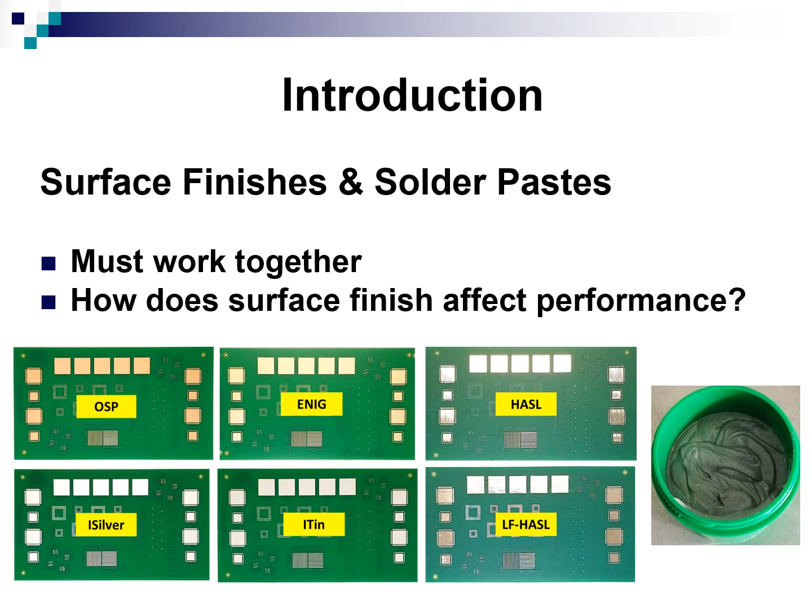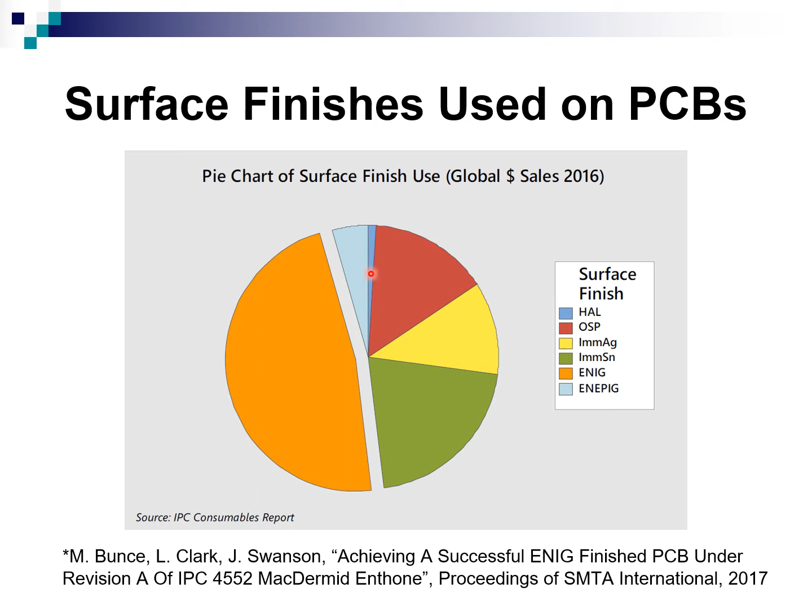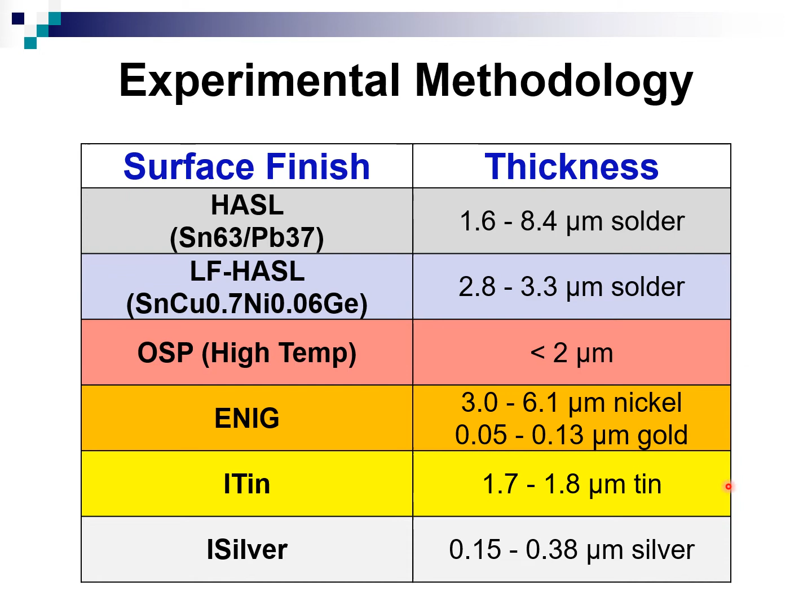The thicknesses were measured for the hot air level coatings to these values. The hot air level tin lead coating ranged in thickness pretty widely, from 1.6 to 8.4 microns, so it was fairly bumpy, not very planar. The lead-free HASL coating, by comparison, was a lot more flat, ranging in thickness from 2.8 to 3.3 microns, which isn't always the case. It is still a HASL coating, so there's still a risk of puddling and pooling, but for these particular test boards, which are fairly simple in design, it was a lot flatter and more uniform than the tin lead coating. The rest of these thickness values are all standard values for the different surface finishes.

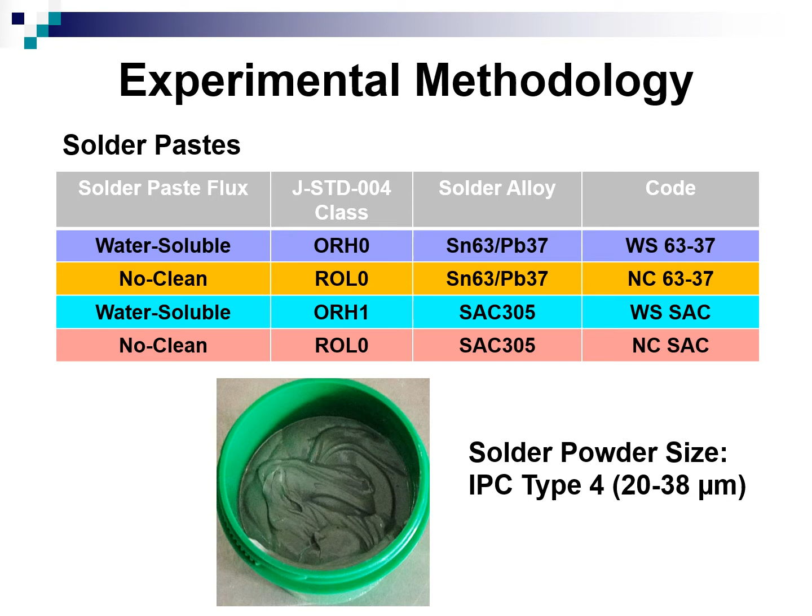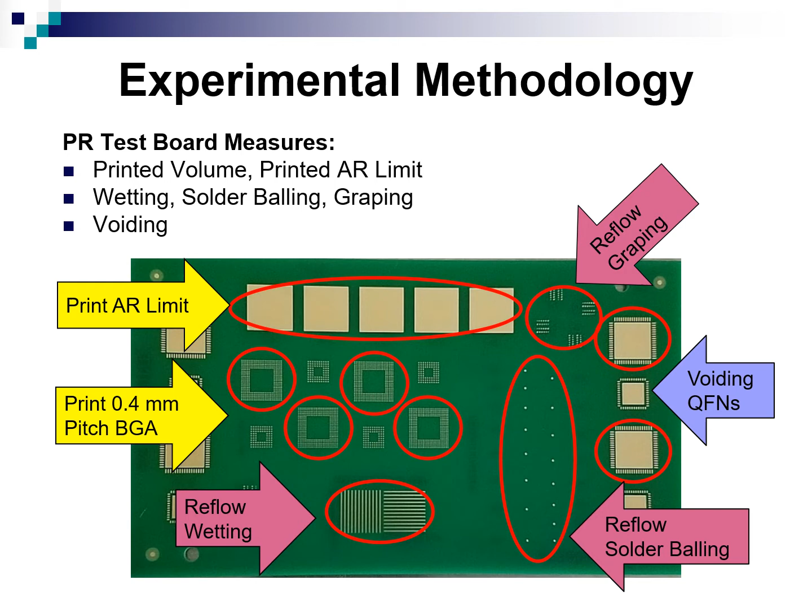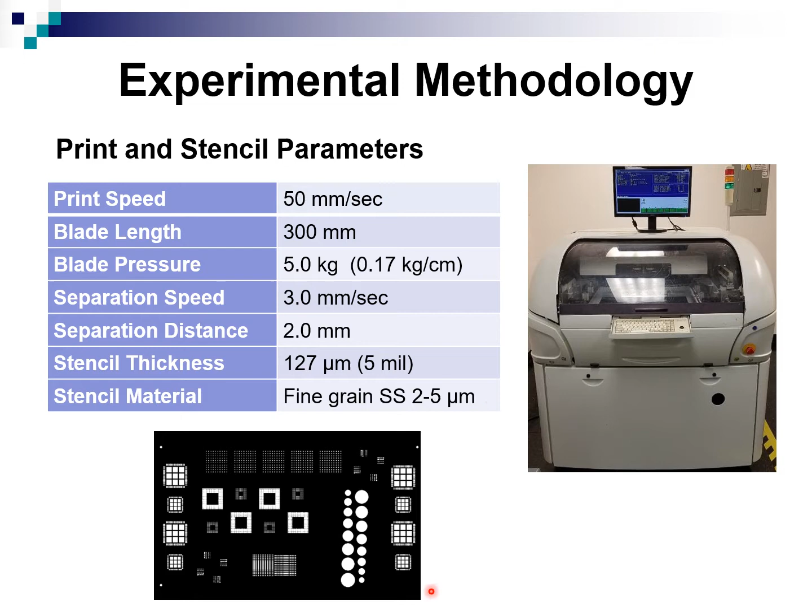Here are the print parameters that we used for this testing. All of the stencils were made of 5 mil thick, fine-grained stainless steel. And this is a picture of what the stencil design looked like.

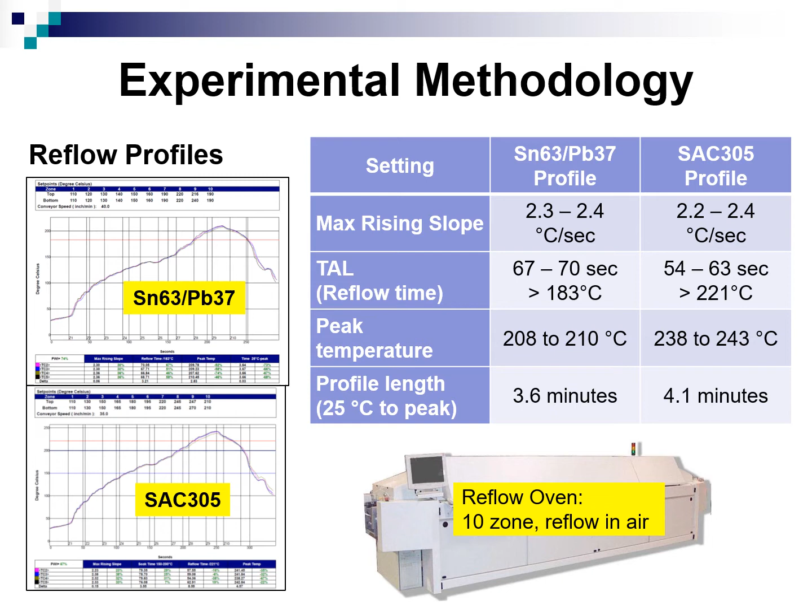So we printed the solder paste, measured solder paste volumes, placed the QFNs and reflowed the test boards. We took pictures of the solder joints. We tallied up the reflow data, and then we measured voiding underneath the QFN thermal pads. And then we repeated this.

We made 10 boards for each combination. There are 6 surface finishes and 4 solder pastes, so there's 24 total combinations. And then from that, the data that we gathered were transfer efficiency and coefficient of variation in both the 0.30 to 0.50 AR limit patterns and the 0.4 millimeter pitch BGA arrays.

In terms of reflow, we measured wetting percentage, solder balling, and graping percentage. And then in terms of voiding, we measured void area and the size of the largest void.

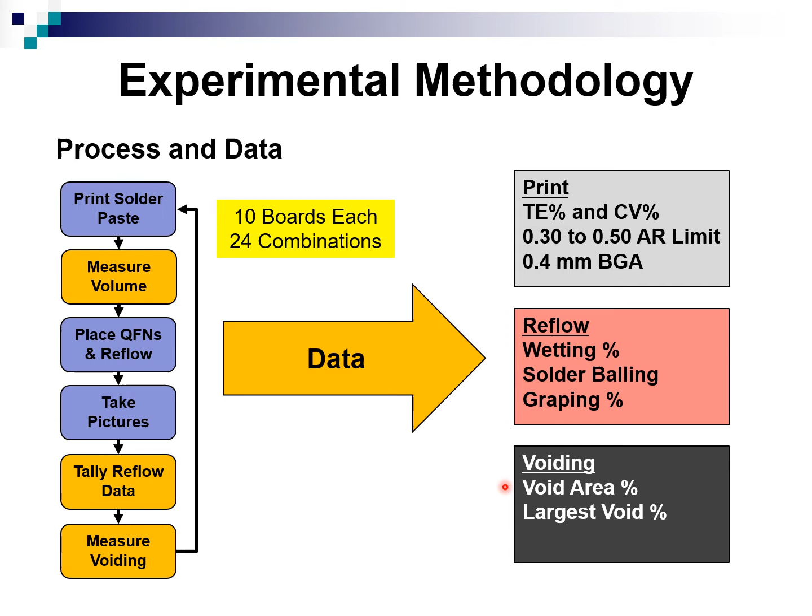Here's an example of the type of statistical analysis that I used in some parts of this presentation. We're going to show data as box plots in some cases. In terms of the box plot, the median or middle value is shown by the line in the middle of the box. The box itself represents the middle 50% of the data points. And then the minimum value is the bottom whisker and the maximum value is the top whisker.

And here's an example of a statistical analysis that we run called a Tukey-Kramer honestly significant difference test. This test allows you to compare data sets to each other and determine whether they are significantly different or if they are statistically similar. So for example, we have transfer efficiency here for the 4 different solder pastes.

And if you look at these box plots, they're all pretty wide. These ranges are pretty wide. And if you just visually compare these with your eyeball, you'd say maybe the tin lead water-soluble paste has a lower volume than the others, but is it significant? There's a lot of overlap here. So it's hard to say just intuitively by looking at these box plots, which is why we run this Tukey-Kramer HSD test.

The Tukey-Kramer HSD test spits out this connecting letters report, which gives you the mean values, and it assigns letter codes to each data set. If the letter codes are different, then the data sets are significantly different with a 95% confidence level. If the letter codes are the same, then they are statistically similar.

So in this case, the water-soluble SAC paste had a higher transfer efficiency than all of the others, and that was significantly higher. Both of the no-cleans are statistically similar, and then the water-soluble tin lead had the lowest overall transfer efficiency, and it's significantly lower than the others.

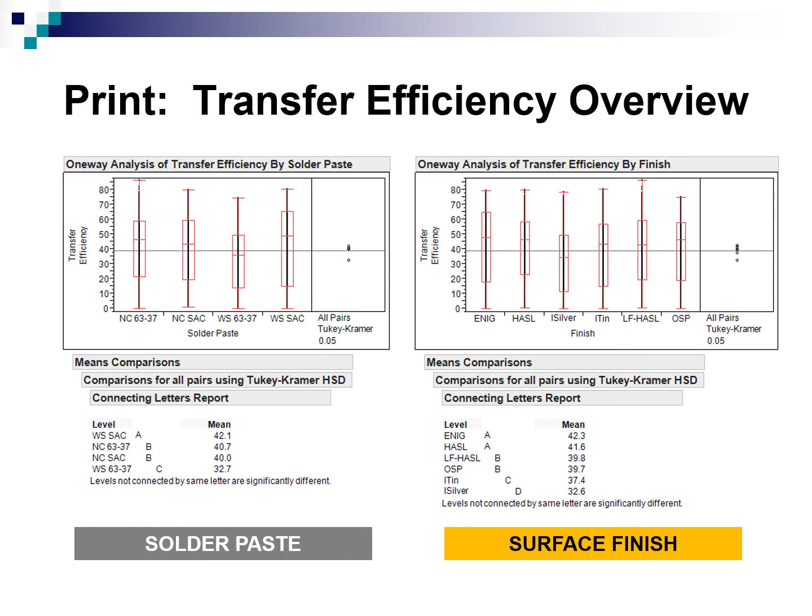Here's how the area ratio limit patterns work, generally speaking. So you've got transfer efficiency here and the different area ratios increasing up to 0.50 here. So at the 0.30 and 0.35, you can see very low transfer efficiencies, 5 to 15%. And that gets progressively higher with increasing area ratio, as you would expect.

This is the 0.50 area ratio pattern, which is pictured here. And then you've got the BGA arrays for comparison. And you get a little bit more volume out of the BGA arrays because those are normal etched pads with a solder mask clearance around them. And so there's some standoff, some off-contact printing going on in the BGA arrays, which is not present in these area ratio patterns because you're printing on essentially a big ground plane here.

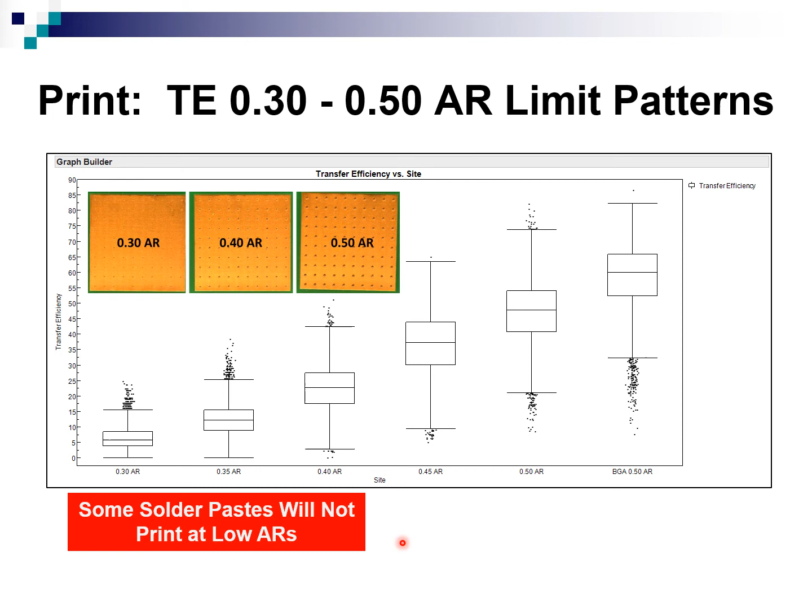But the whole point of using these is to see where the lower limit is. And some solder paste just will not print at these really low area ratios. So this really challenges solder paste, particularly in terms of printability.

Here's the transfer efficiency data for the 0.50 area ratio patterns. You've got transfer efficiency on the y-axis, and then the 4 different solder pastes are the major categories here, and the box plots are different colors for the different surface finishes.

I just want to point out that there is a lot of variation here. Look at the no clean tin lead paste - there's a lot of difference in transfer efficiency for these different surface finishes, and that's true for most of these pastes. The water-soluble SAC paste shows a little less variation. It prints somewhat equally well on all of these surface finishes.

Now I highlighted in red the HASL surface finish, and in green the immersion silver surface finish. The red HASL surface finish had the highest overall volumes in this pattern. The green immersion silver surface finish had the lowest overall volume in these patterns.

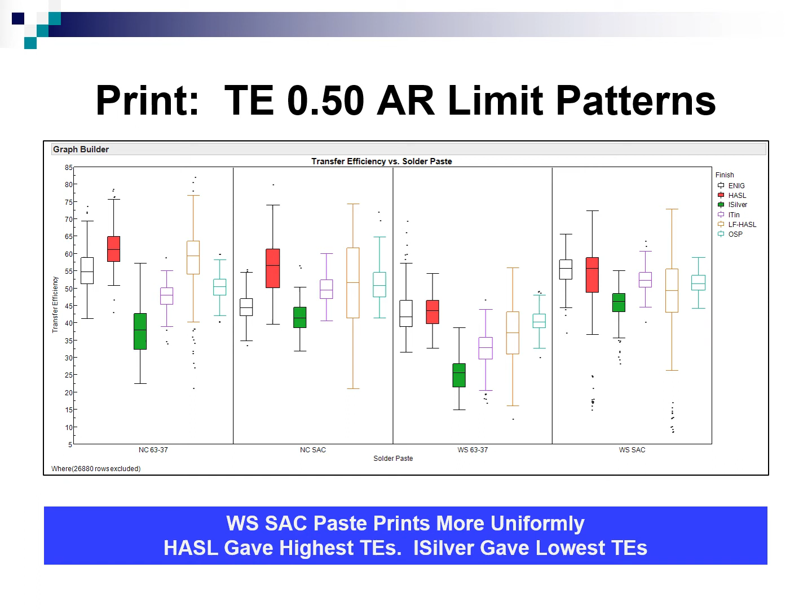Here's the same type of data for the 0.4 millimeter pitch BGAs, which happen to have a 0.50 area ratio as well. Again, there's a lot of variation here within each paste, except for the water-soluble SAC, which seems to print pretty equivalently well on all the finishes.

ENIG is highlighted in blue in this case, and immersion silver in green. So the ENIG surface finish gave the highest overall transfer efficiencies for each of these solder pastes, and the immersion silver was the lowest overall for each solder paste.

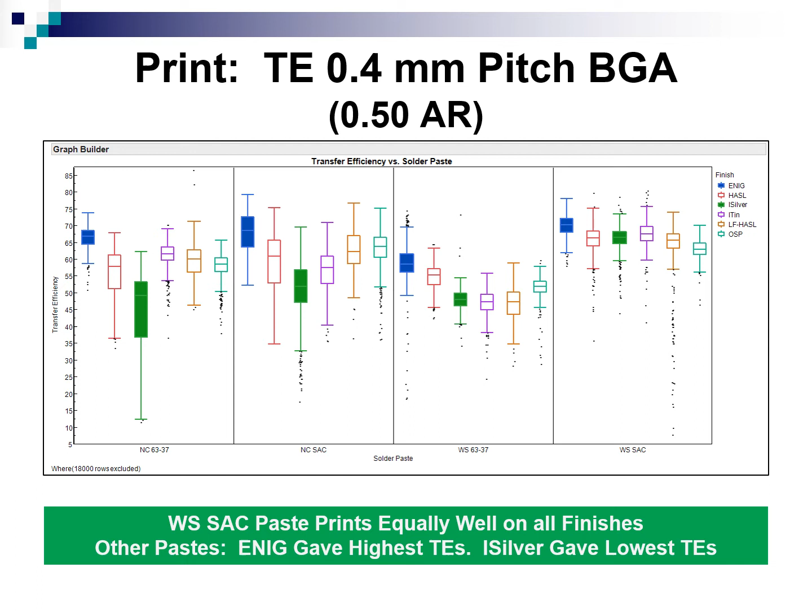Here's a summary of transfer efficiency and coefficient of variation for the 0.4 millimeter pitch BGAs, separated by surface finish. Here's the mean transfer efficiency data, the standard deviations, and then the coefficient of variation. Coefficient of variation is a measure of variability in the process, and the goal is to have a CV value of less than 10%.

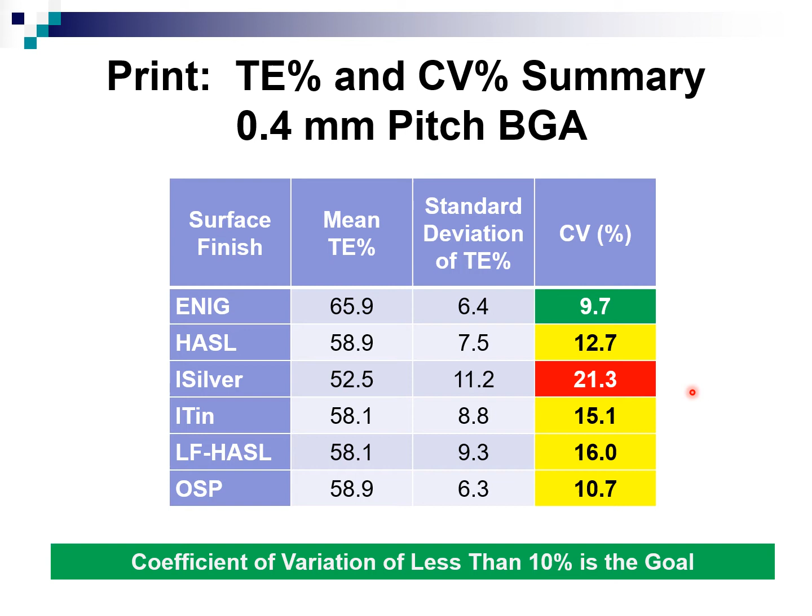Only ENIG matched that goal or went below that goal. HASL, immersion tin, lead-free HASL, and OSP all had values between 10 and 16% coefficient of variation, which isn't great, but it's definitely better than the immersion silver, which had a coefficient of variation of over 20%. So that means that there's a lot of volume variation when printing on immersion silver for these 4 solder pastes.

Here are the reflow test results.

Here's the wetting data. I'll briefly explain how the wetting pattern works. This wetting pattern has parallel lines with 15 bricks of solder paste printed down each line. Those spacings range from 0.1 millimeter in the center to 0.4 millimeter on the outside. Then during reflow, all those bricks merge together to form smooth continuous lines, as what's shown here. This is ideal wetting performance, or 100% wetting is the goal.

So this is the wetting data broken out by solder paste, including all of the surface finishes. No clean tin lead and water-soluble tin lead both wetted almost 100% on all the surface finishes, whereas the no clean SAC was down around 70 and the water-soluble SAC was down around 80% for all the surface finishes.

Here's that same wetting data broken out by surface finish. It includes all 4 solder pastes within each bar. So ENIG, immersion tin, and lead-free HASL all wetted very easily. They all had 100% wetting, followed by HASL and immersion silver, which were around 80%, and then OSP was the lowest overall wetting with about 55% spread.

Here's some pictures to show that OSP wetting or spread. This is the no clean SAC on OSP. These bricks pretty much stayed right where they were printed. They didn't flow very much. Whereas with a no clean tin lead solder paste on that same OSP finish, you get good wetting or spread where the bricks merge together very well.

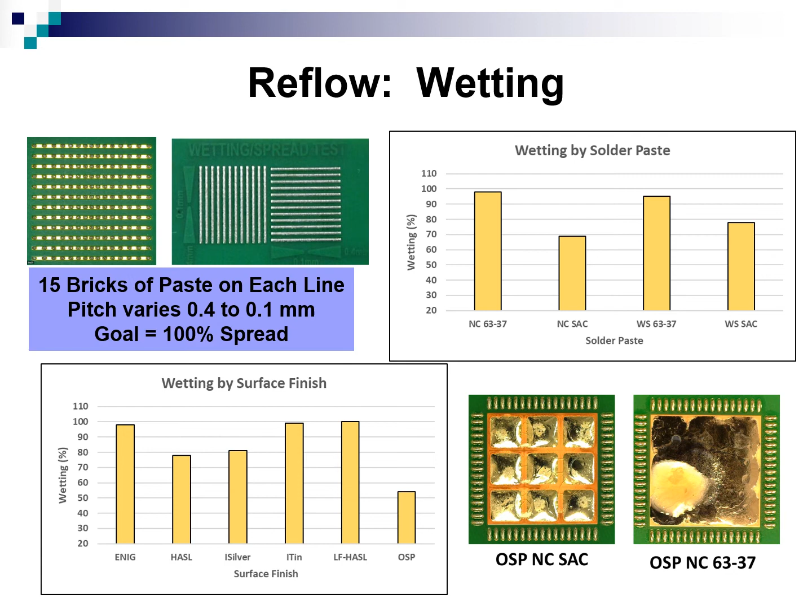Here's the wetting data for each surface finish and solder paste combination. The surface finishes are shown in the major categories, and then each solder paste is broken out within those. So ENIG, immersion tin, and lead-free HASL again had near 100% wetting regardless of solder paste. HASL had some variations - the tin lead solder paste had 100% wetting, and the lead-free solder pastes had 50 and 62% wetting.

Immersion silver had some variation as well. Water-soluble SAC wetted at almost 100%, followed by the no clean tin lead. Then the water-soluble tin lead and the no clean SAC was the lowest wetting on immersion silver.

And if you look at OSP, it had the widest variation of all the finishes. Both of the tin lead pastes had near 100% spread, whereas both of the lead-frees were down around 10 to 15% spread. These 2 pictures at the bottom show the best case and worst case scenario. You've got lead-free HASL with water-soluble SAC, 100% spread or wetting, and then the OSP with the no clean SAC - you can see these bricks didn't merge together very well. They pretty much stayed right where they were printed and didn't spread on those lines. So the wetting percentage was 11% in that case.

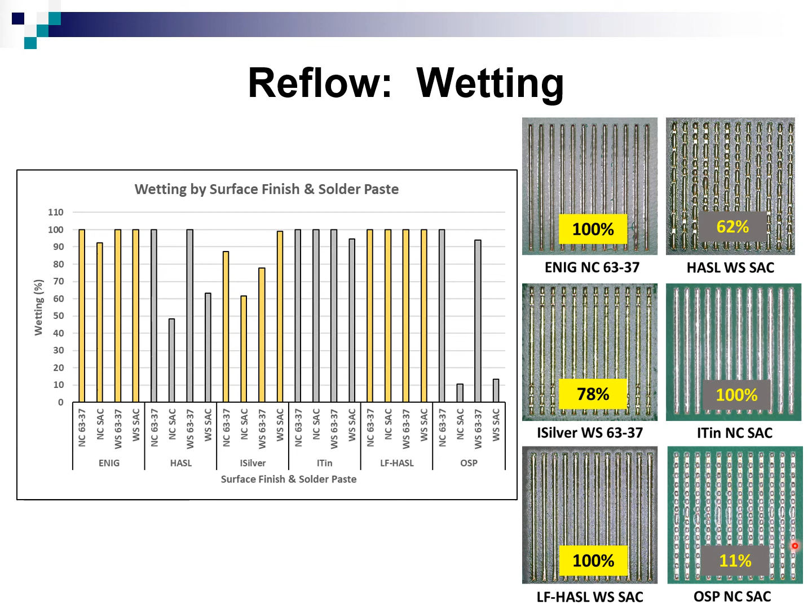Here's the solder balling data. The solder balling patterns work like this: there are 20 mil diameter pads on the circuit board surrounded by solder mask. We overprint onto the solder mask between 500% and 1250% over the size of those pads. Then during reflow, those pull back into a central sphere, and we inspect the flux pool for solder balls. We're talking about microscopic random solder balls here.

We measured solder balling in 3 performance categories: the largest overprint that had 0 solder balls, the largest that had less than 5, and the largest that had less than 10 solder balls. Then we gave them a rating. The goal is 1250%, which is the largest overprint. If you hit that rating, that is best possible performance.

Here's solder balling broken out by solder paste. In general, the no cleans and the water-soluble tin lead all had very good solder balling performance, where the water-soluble SAC did not have very good solder balling performance.

Here's that same data broken out by surface finish. ENIG, HASL, lead-free HASL, and OSP all had excellent solder balling performance. Immersion silver and immersion tin were a little worse in terms of solder balling, a little bit lower data here.

Here's an example of what we're looking at. Here's the OSP with water-soluble tin lead. You can see some rings of solder balls in these flux pools.

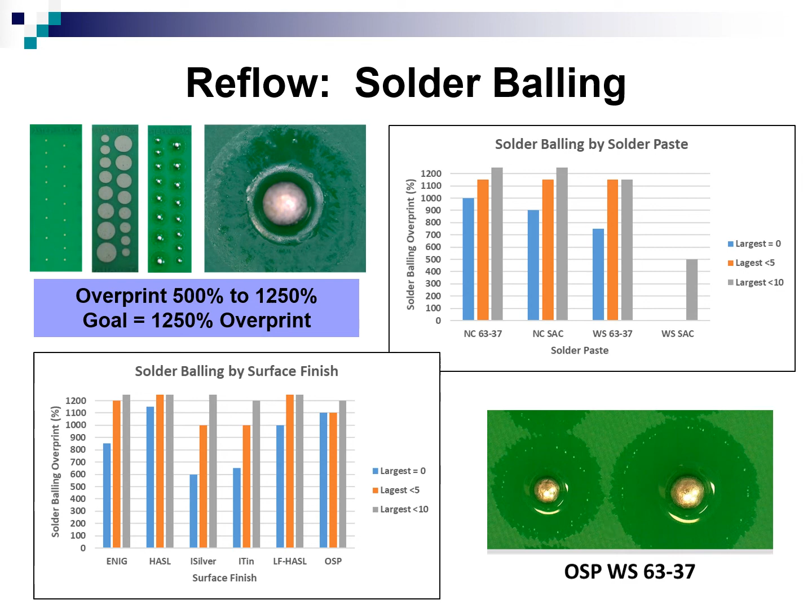Here's the graping data. Here's how the graping test pattern works. There are 4 columns of pads, both circles and squares, non-solder mask defined and solder mask defined, and they change in size. The size of the pads ranges from 7 mils up to 12 mils, and the area ratios on the stencil correspondingly are 0.35 up to 0.60. So really small area ratios again, which challenge the printability of the solder paste. The lower volume deposits tend to be susceptible to graping during reflow.

The goal here would be to have 0% graping. So the graping looks like this picture below. You can see these larger deposits are very smooth and well formed, and then the smaller deposits here have clearly graped deposits.

Here's the graping data broken out by solder paste, including all finishes. No clean tin lead was the lowest, followed by water soluble SAC, then water soluble tin lead, and then no clean SAC had the highest graping, generally speaking.

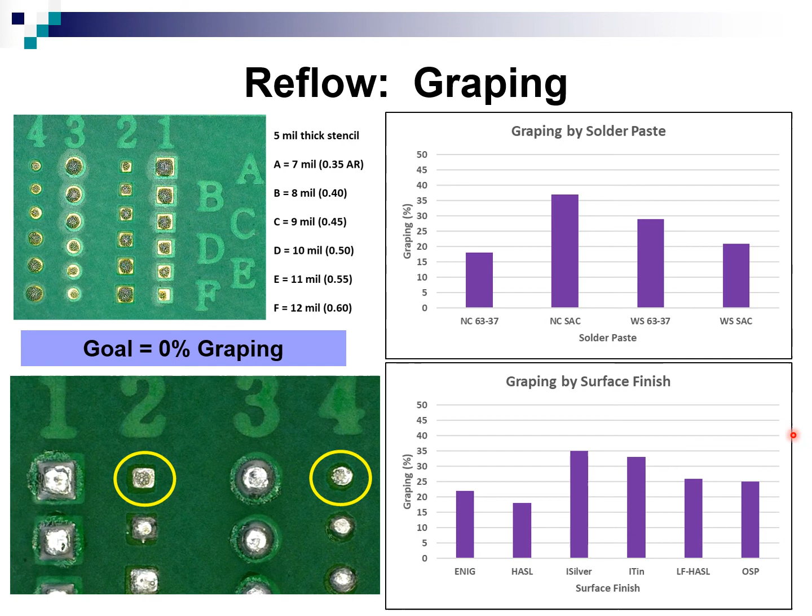Then the graping broken out by surface finish: you've got ENIG and HASL, which are the lowest, followed by lead-free HASL and OSP, and then immersion silver and immersion tin gave the highest overall graping. This includes the data for all of the solder pastes.

Here's the graping for every combination of surface finish in each measure category and solder paste broken out for each line. Again, you see variation on these finishes. Generally speaking, ENIG and HASL had pretty low graping numbers, but there's some variation based on these different solder pastes. Immersion silver had high graping with most of the pastes, but low graping with the no clean tin lead.

And immersion tin had high graping with most pastes, but low graping with the water soluble SAC. The lead-free HASL had pretty wide variation, and the OSP again had the widest variation. So the no clean tin lead paste on OSP gave almost 0% graping, whereas the no clean SAC gave 45% graping, which is the highest overall graping.

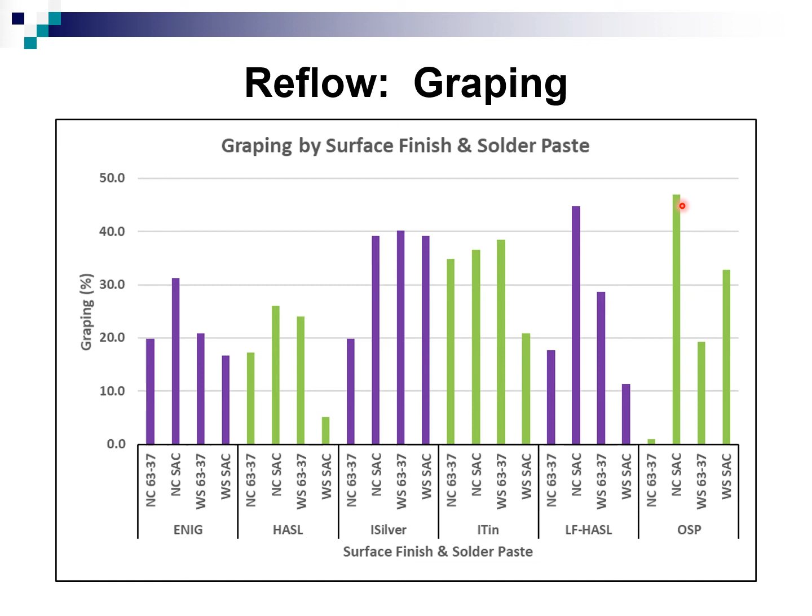Here are the voiding test results. In terms of voiding, what we're doing is we're printing solder paste in a 9-window pane pattern on the QFN thermal pad, placing these QFNs, which have a matte tin finish. The body size on that is 10 millimeters across. The goal here would be to have 0% void area, but that's not what we got. So we got some voids that look like these pictures below.

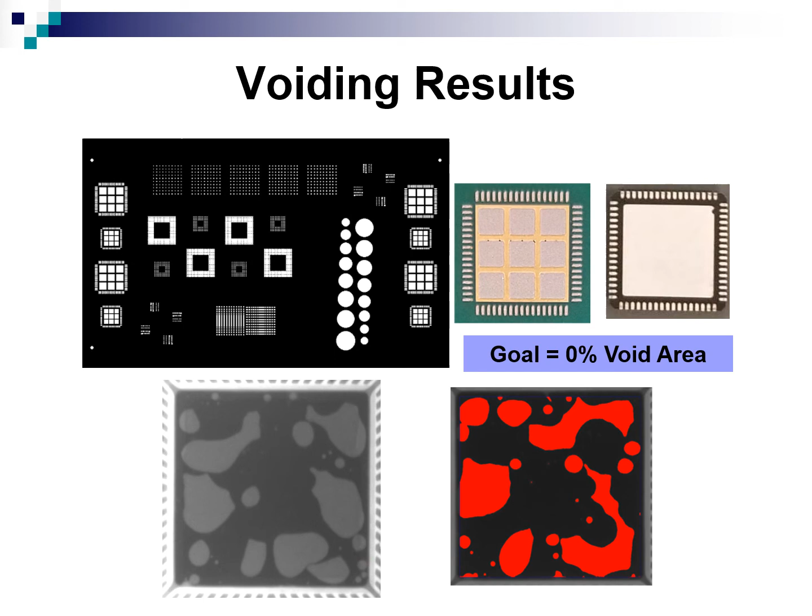Here's the voiding broken out by solder paste. Water-soluble tin lead is the lowest, followed by no clean tin lead, no clean SAC, and then the water-soluble SAC is clearly higher here. The Tukey Kramer analysis validates that. Water-soluble SAC is the highest voiding with 28% void area, followed by no clean SAC, which is 11% void area. Then no clean tin lead is 7%, and the water-soluble tin lead was as low as 4% void area. This includes data for all the surface finishes, so there's clear differences in void performance based on solder paste.

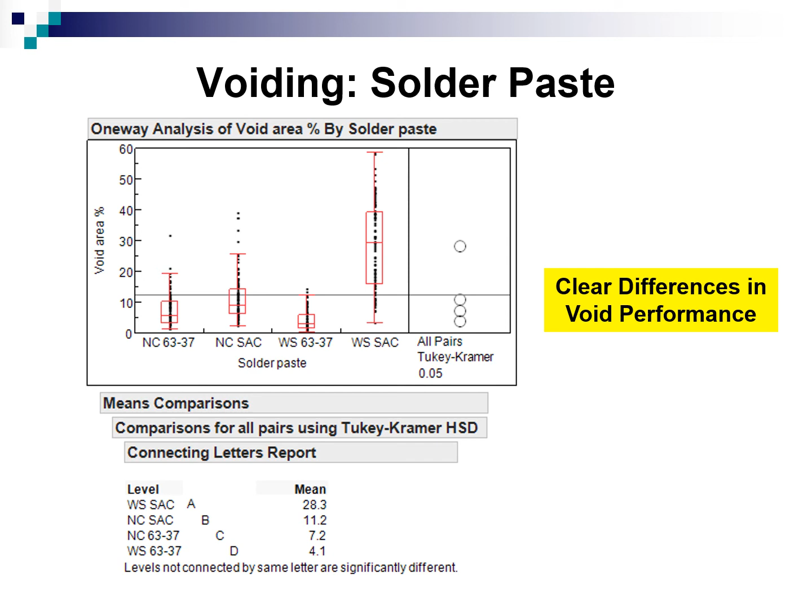Here's the voiding data broken out by surface finish, including all of the solder pastes within each surface finish. Immersion silver has the lowest overall voiding, followed by a combination of ENIG, HASL, lead-free HASL, and it looks like OSP and immersion tin are the higher end voiding. But there's a lot of overlap here in these data sets.

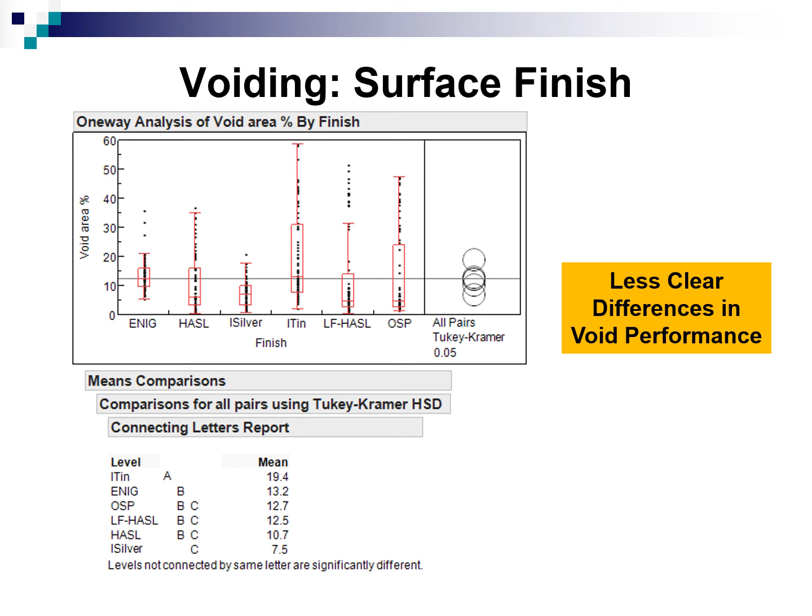Looking at the connecting letters report, immersion tin had the highest overall voiding, and that was significantly higher than all of the others. Then ENIG through HASL here have the same letter code, so they're all statistically similar. And then OSP through immersion silver all have the same letter code, so those are all statistically similar. Immersion silver did have the lowest mean, but it's statistically similar to the three surface finishes above it here. So the voiding differences based on surface finish are a little less clear than they were by solder paste, but there are some differences.

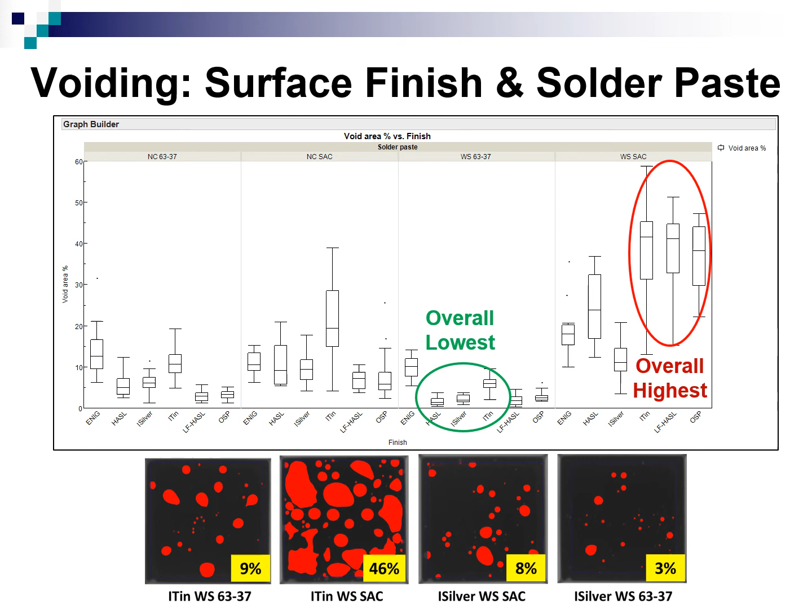Here's the scoring system. I came up with a scoring system to try to sort out these combinations. I wanted to quantify what was the best set of solder paste and surface finish combinations and which were the worst surface finish and solder paste combinations.

So here's the way I set up my scoring system. I measured performance in these 9 different categories - I've got 4 print categories, 3 reflow categories, and 2 void categories. I assigned a total possible score of 5 points, 1 would be the lowest score, 5 is the highest. And then I tallied up the scores for each of these combinations, and the total possible is 45 points for each surface finish solder paste combo.

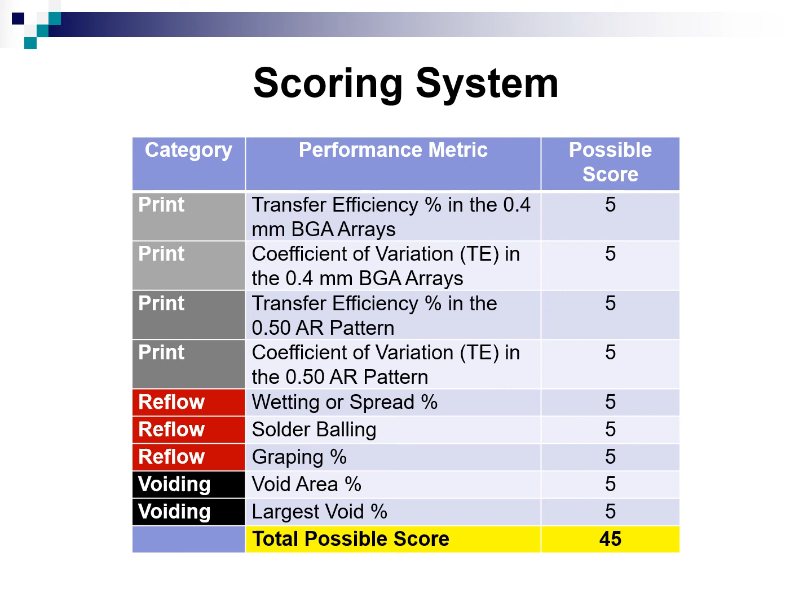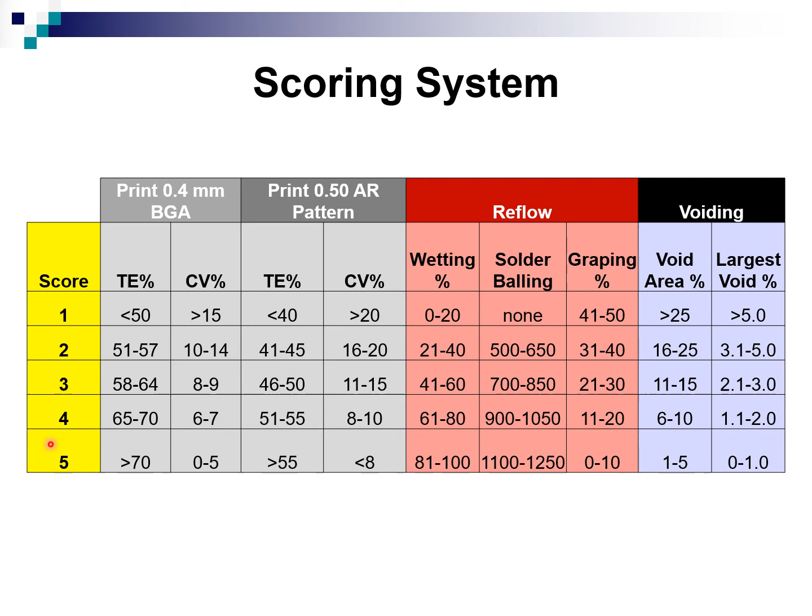Here's the actual scoring system that I used. Here's the different scores. Again, 1 is the lowest or worst performance, 5 is the highest or best performance, and here are the metrics that I used to rank performance.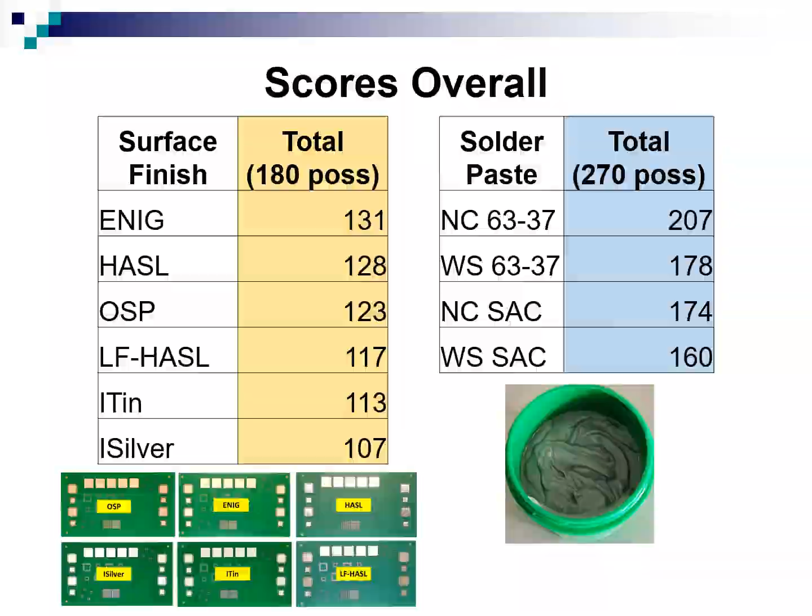Here's the total set of scores of every surface finish and solder paste combination. Here's the print score, the reflow score, the voiding score, and the total out of 45. And these are ranked from highest to lowest. So at the top, you've got OSP no clean tin lead, ENIG no clean tin lead, lead-free HASL with no clean tin lead, and so on. If you look at the top 10, there's 7 tin lead solder pastes, 3 ENIG finishes, and 3 HASL finishes.

Then if you look down at the lowest scoring combinations, you got lead-free HASL with water-soluble SAC, OSP water-soluble SAC, immersion tin water-soluble tin lead, immersion silver with no clean SAC, and so on. There are 7 SAC solder pastes in the bottom 10, 3 immersion tin and 3 immersion silver surface finishes. So generally speaking, the tin lead pastes outperformed the SAC solder pastes. ENIG and HASL outperformed the immersion tin and immersion silver surface finishes. And the other combinations were in the middle.

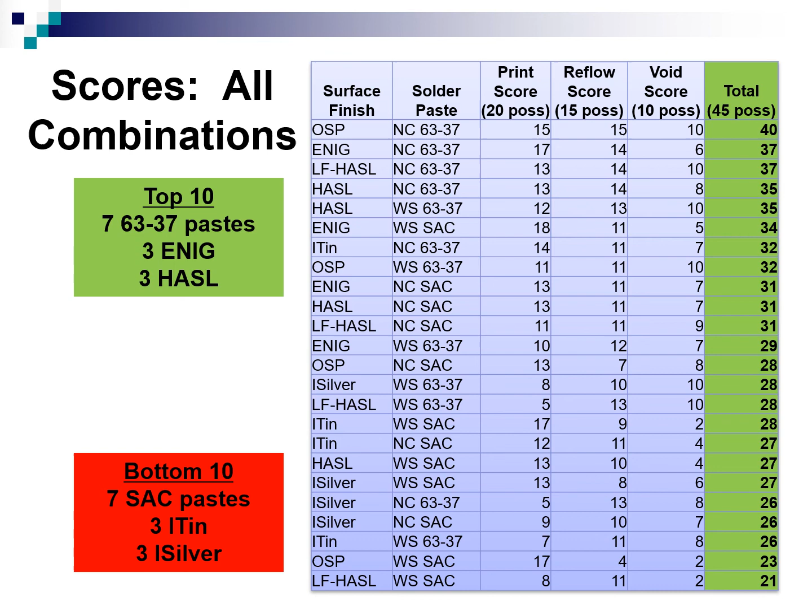Here's that same set of scores, but these are blocked together, grouped together by surface finish. So within each surface finish grouping, they're sorted from highest to lowest score so that you could pick a surface finish and solder paste that had the best possible scores. Of course, if you look at these, you've got ENIG with no clean tin lead, HASL no clean tin lead, immersion silver water-soluble tin lead, and so on.

Like the tin lead pastes are the highest scoring. So if you have to use lead-free, then you'd have to move down a little bit and say, okay, ENIG with water-soluble SAC is a good combination, HASL with no clean SAC, and so on and so forth.

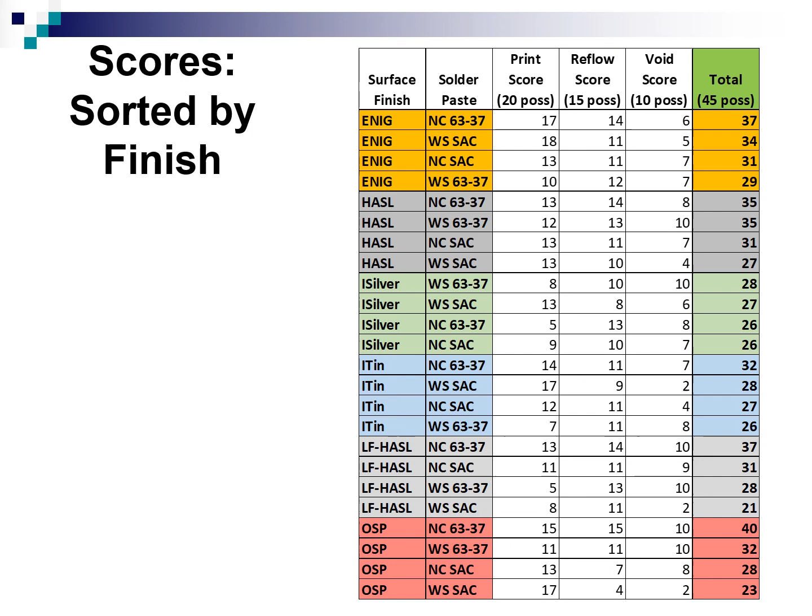Here's an overview of all of the scores. This is an overview of surface finish performance, covering the surface finishes that I tested in terms of printing, reflow, and voiding performance.

ENIG had good print and reflow performance, but it was not very good in terms of void performance. Tin lead HASL was okay, or moderately performing across the board.

Immersion silver was pretty poor with print and reflow, but it was excellent with voiding performance. It was the lowest overall voiding surface finish.

Immersion tin was moderate with print and reflow and not so good with voiding. It had one of the highest overall voiding numbers.

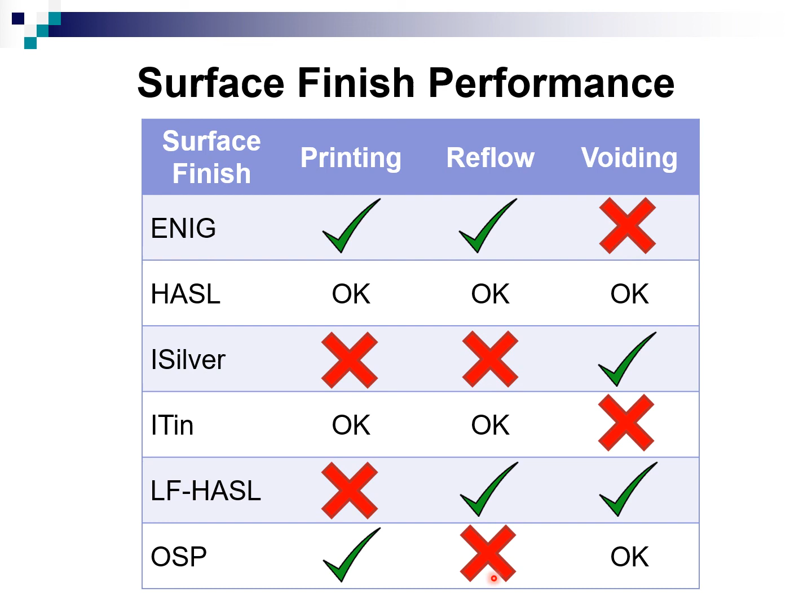Lead-free HASL was not so good with print, was very good with reflow and voiding performance. OSP was good with printing, not so good with reflow, and it was okay or moderate with voiding performance.

So from all this data, here are the conclusions that we can draw. The no-clean tin lead solder paste worked well with most of the surface finishes, but the no-clean SAC 305 would be the best lead-free option for the surface finishes that we tested.

ENIG and tin lead HASL worked well with most of the solder pastes, so if you have a choice to choose your surface finish, I would recommend one of those two.

Immersion tin and immersion silver did not perform as well as the other finishes, and that was a little surprising to me. I expected better performance out of those two. They need to step it up next time.

And then OSP and lead-free HASL gave a wide range of performance depending on the solder paste. In some cases, their performance was excellent, and in other cases, it was not very good.

So the performance of these combinations definitely depends on both the solder paste and the surface finish that you're using.

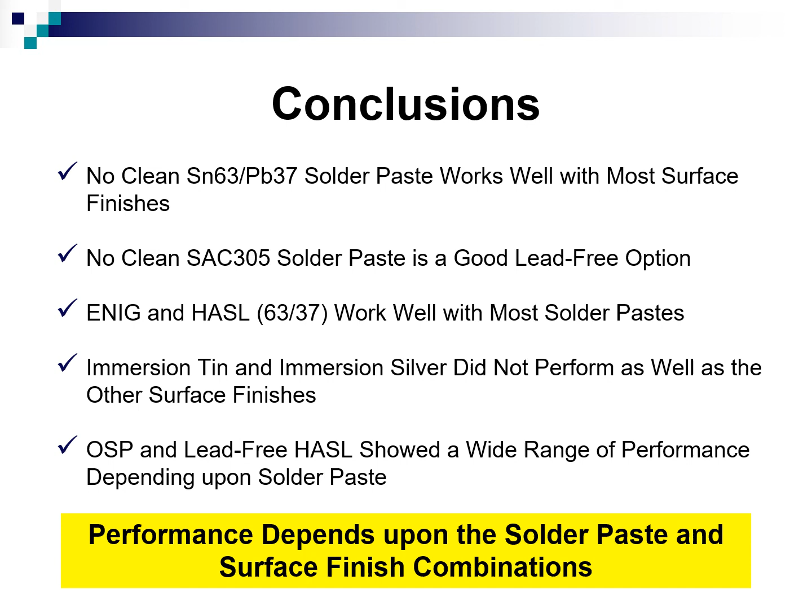Here are recommendations. We would recommend you run a similar evaluation in your process with your surface finishes and your solder pastes. And if you have the ability to change your surface finish, I'd recommend you pick a couple that work well with the paste that you're using.

Or vice versa. You can't change the surface finishes, but you can pick your solder paste. Pick some solder pastes that work well with all of the finishes that you use.

Now, one thing I should say is that surface finish and solder paste varied pretty dramatically by manufacturer. Obviously, I used our solder paste in this experiment. If you use solder paste from one of our competitors, they're going to perform a little differently in this testing. That's why I'd recommend you run a similar evaluation.

And in terms of surface finish, two different circuit board manufacturers with the same process and the same chemistry from the same supplier might run them differently, and they might have different process controls. So you might get different results on the surface finishes from two different board suppliers.

So I'd recommend that you test your surface finishes from each board supplier that you deal with. I know that sounds like a lot of work, but it's the only way to really be sure you're going to be able to predict performance of those surface finishes with your solder pastes.

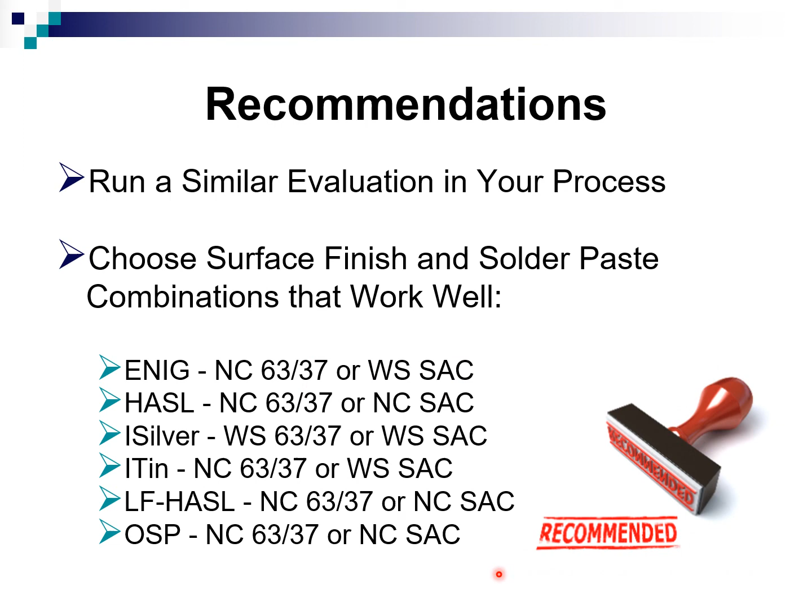And then here I listed combinations that actually work the best for us, and I picked the best performing tin lead and the best performing lead-free for each surface finish from our experimentation.

The future work that I've planned on this is I would like to explore additional combinations of surface finish and solder paste. I want to include other lead-free alloys besides SAC 305. I'd like to run some testing on tin silver and possibly tin bismuth alloys.

The print parameters will be varied to some different print speeds and maybe different blade pressures to see how that affects printability. I will also vary the reflow profiles a little more widely.

In this case, I just used linear ramp to peak profiles. I would like to use some soak profiles and possibly high peak temp or long time above liquidus type profiles. I'm sure that'll have an effect on some of these surface finishes.

And then reflow performance will be measured on the second cycle to simulate double-sided surface mount work. So I'll thermally stress the boards one time through the oven, then I'll print and reflow and measure data on the second pass through the oven. I'm sure that'll damage some of these surface finishes and show us pretty different performance.